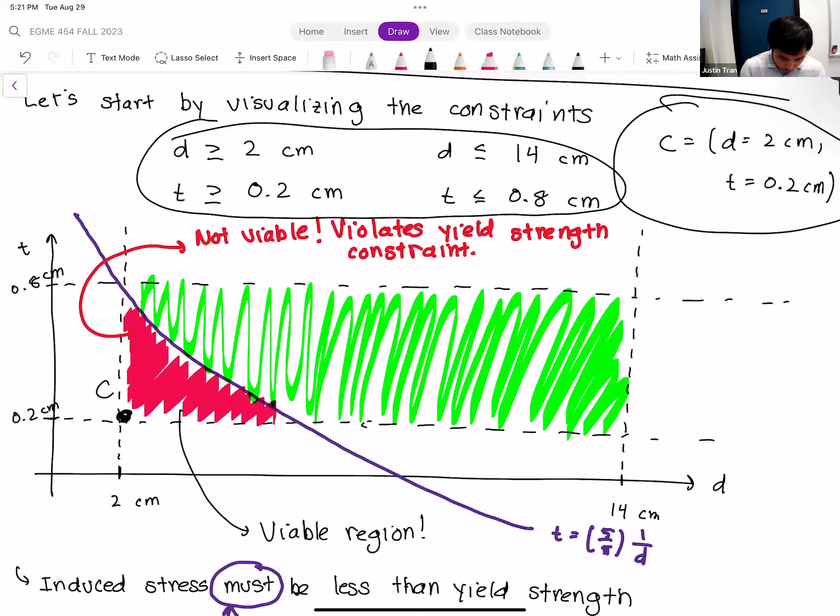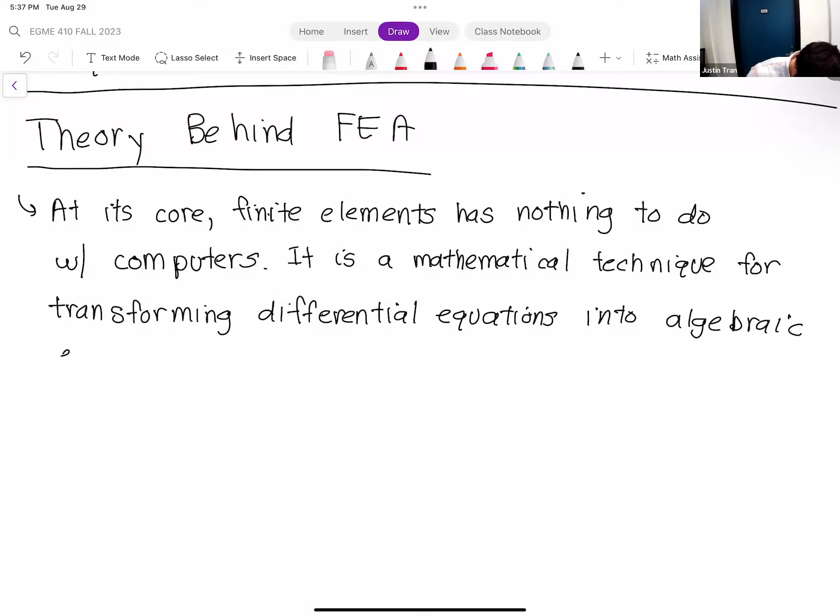So it's basically a form of transformation. In reality it's a lot more complicated than that, but that's generally its main scheme.

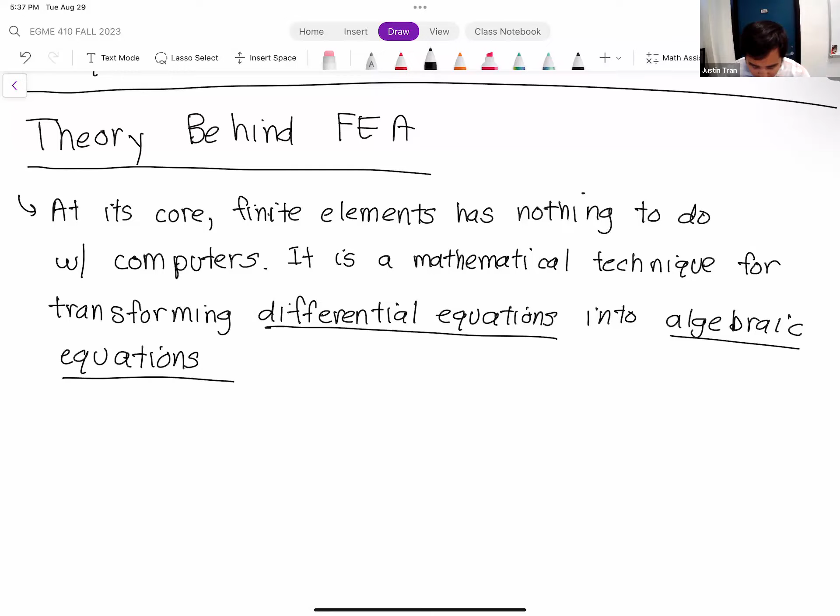The first papers proposing this idea of finite elements kind of wrote it like the following. This was during a time when it was being discovered that a lot of physical phenomena—things like structural mechanics, thermal mechanics, heat transfer, fluid mechanics—the behavior of a lot of these systems are governed by differential equations. For example, here's the heat equation, one form of it.

Okay, so here we have a differential equation. There's a lot of very well established theory, that you may be learning right now in heat transfer 407, or maybe you took 407 last year, that says that by conservation of energy, the way thermal energy moves in a system follows this equation right here. That's very well established. The problem with an equation like this is that this is hard as hell to solve, right? So this is not an easy equation to solve, at least by hand.

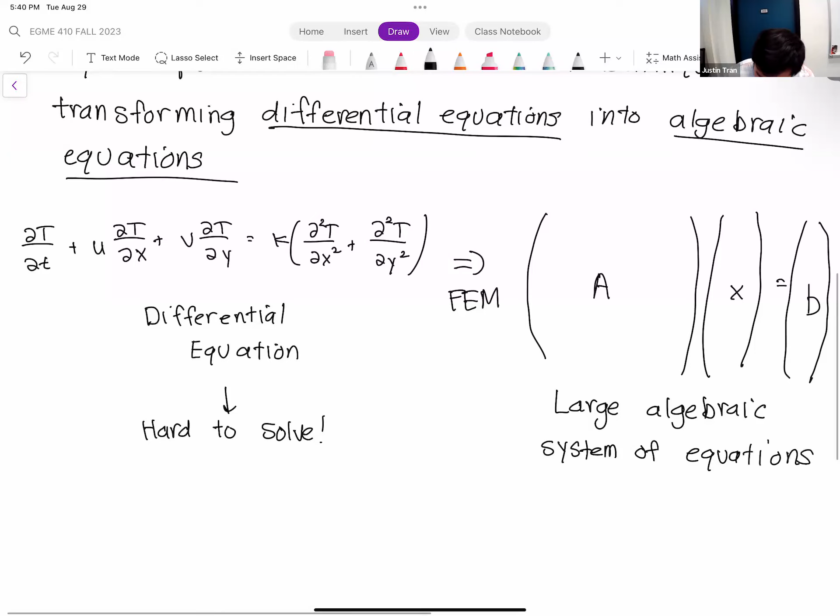And when I say large, I mean very, very large. From your linear algebra classes, a large linear system to you may be 3 equations, 3 unknowns, 4 equations, 4 unknowns, 5 equations, 5 unknowns. These are much larger than that. This is like hundreds, thousands, tens of thousands, hundreds of thousands of equations. So this might be 100,000 by 100,000 equations by unknowns.

So that's the basic idea of FEM: take a differential equation and transform it into an algebraic system equation. The problem with this is that before computers came along, very much like the differential equations, a large system of algebraic equations is also extremely difficult to solve. So we're not really saving ourselves any work here. We're just going from one extremely difficult problem to another, except that along the way, we apply this extremely difficult method known as finite element methods.

So when FEM was first proposed, the mathematics behind it were sound, and they were able to publish it, but there were no real good practical applications of it just because of the difficulty in solving this large system.

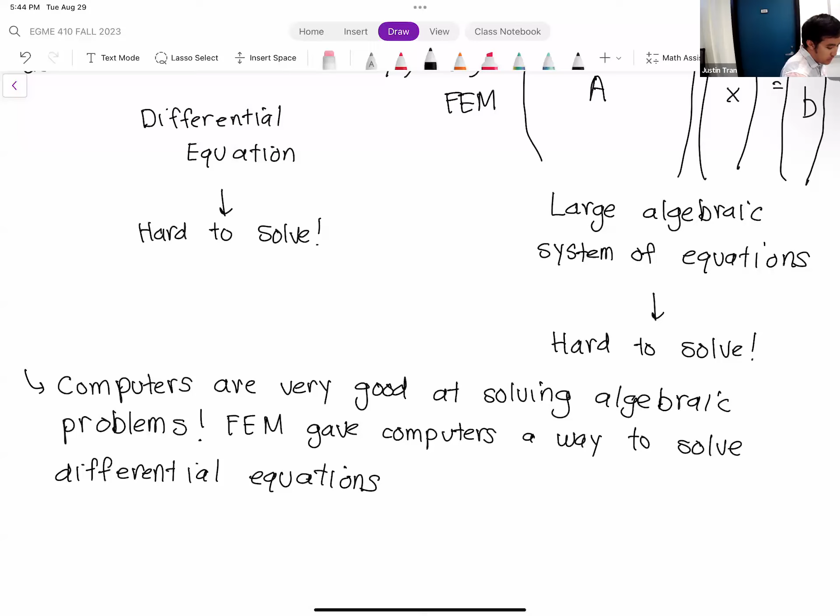So FEM gave computers a way to solve these differential equations, which was massive at the time. On one hand, you have one community of scientists saying that all these physical phenomena we observe in the real world are governed by differential equations, but they're really difficult to solve. Whereas in another area of science and research, they're saying we can take these very complex differential equations, transform them into algebra equations, and have a computer solve them. Once those two communities married each other, modern FEA as we know it was formed.

And from this, we were able to obtain what I consider to be the engineering application, the engineering use of FEA. I have it laid out as a flow chart. Let me label this first: call it modern engineering use of FEA.

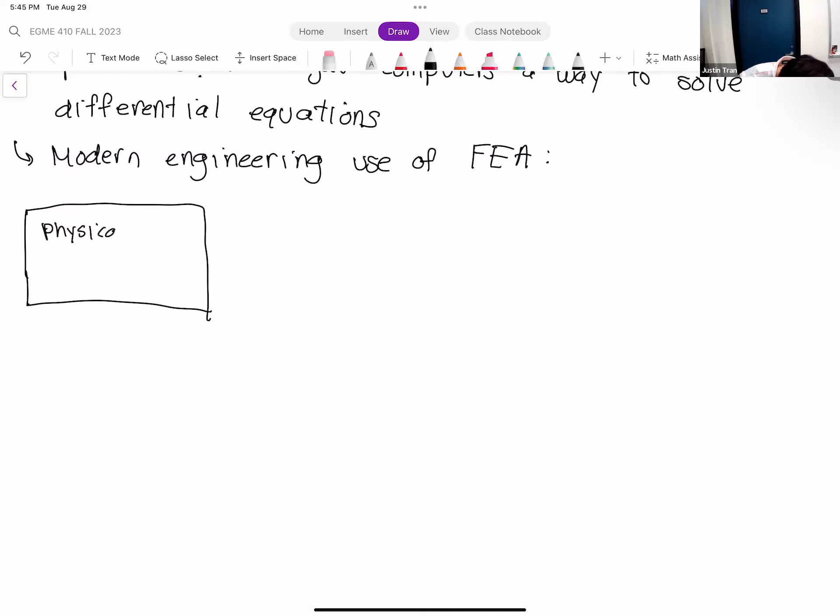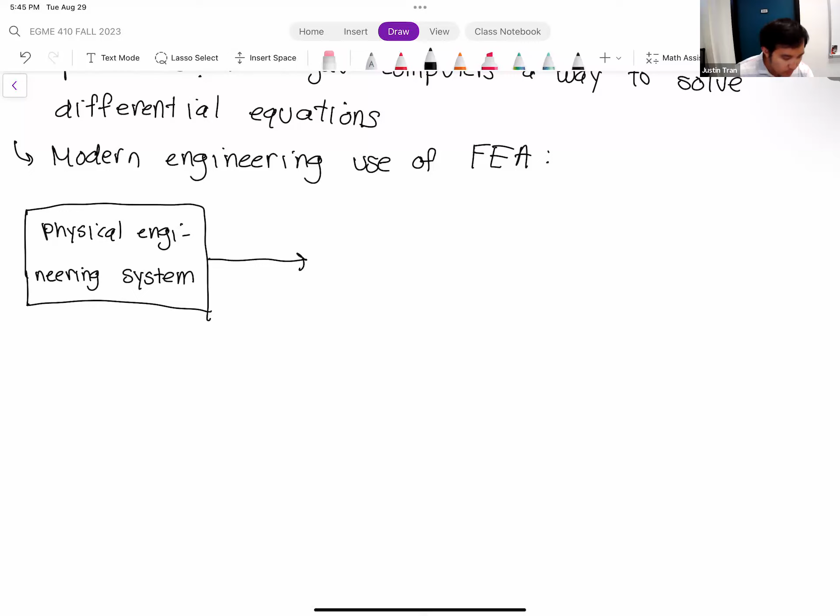So when you're using FEA from an engineering standpoint, most of the time you're starting with some physical system of interest. Whether this be the car that you're designing or a bridge that you're analyzing, you have some kind of physical system. And then from that physical system, it has its own set of governing differential equations.

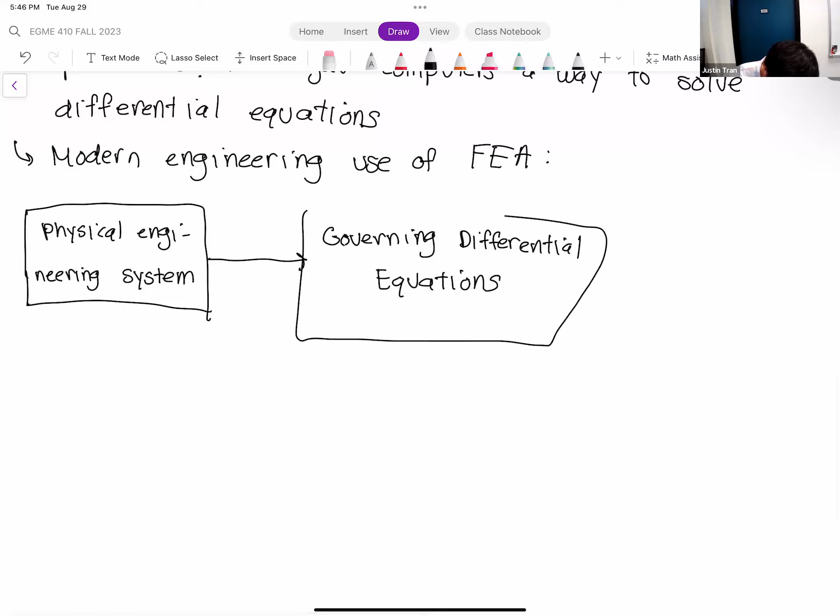Those governing differential equations are what's going to determine the system's behavior. They determine how the system responds to loads, how it responds to constraints, and so forth. If you're going to do any kind of design or analysis of these systems, you have to be aware of what those equations are.

So from here, what you would do is take those governing differential equations and try to solve them using FEA. This arrow right here in particular is FEA. Through FEA, or through using ANSYS, you take those governing differential equations, apply them on your domain of interest, on your geometry, and then you obtain an algebraic system of equations.

Once you have that algebraic system of equations set up, then you can use computers. Computers are really good at doing algebra, and so they're able to solve this system for you.

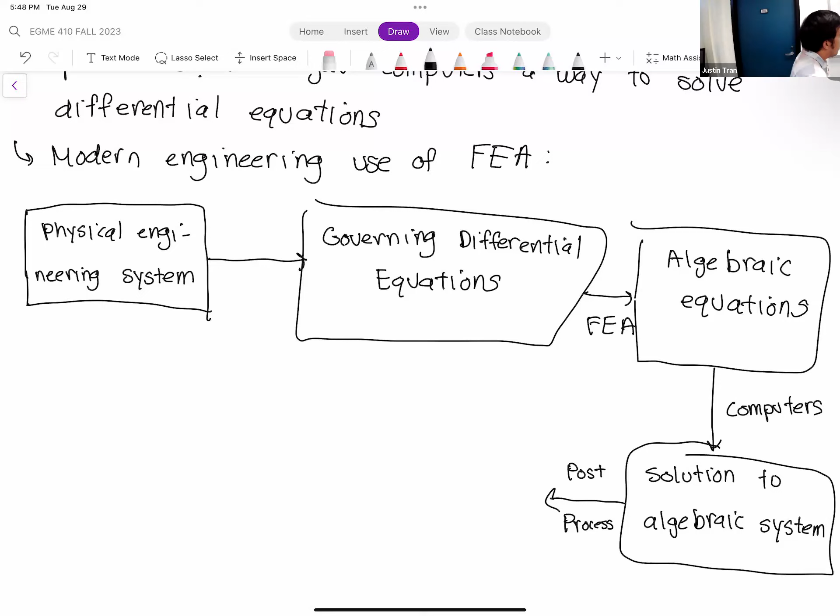From that solution to the algebraic system of equations, that's what I call a raw solution. In its form by itself, it's not really readable by humans, or usable by an engineer. So there's an additional step here, which I call post-processing, that's most of the time done automatically by the computer. What it does is take that raw solution and present it in a form that's useful to the engineer.

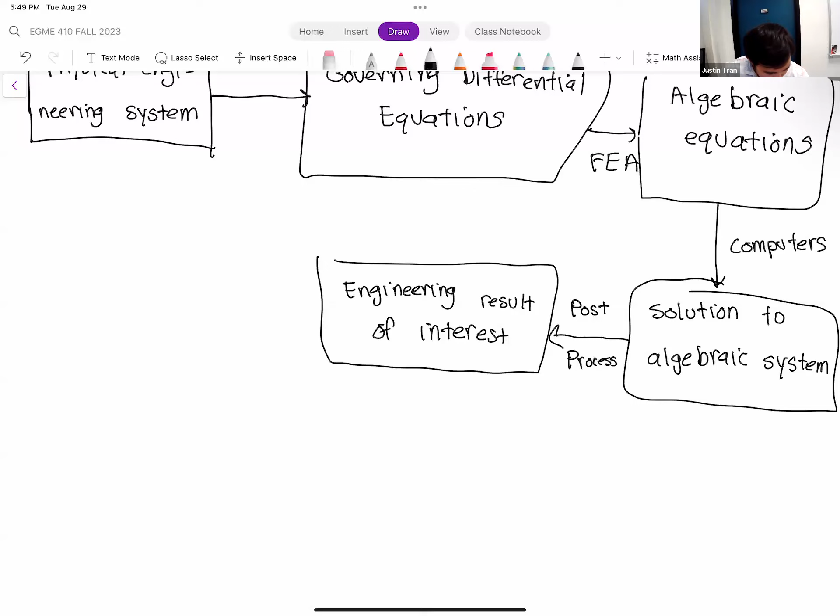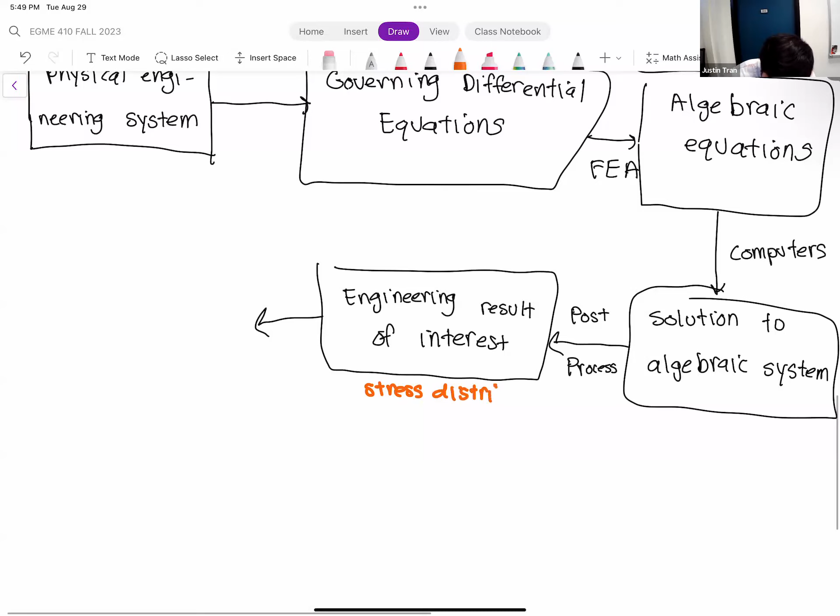From that, you obtain what I call the engineering results of interest, things like stress distributions, deformations, things like the results that we found from our first activity. So what you do then as an engineer is take that information, and that's when you perform your design and analysis and safety analysis and things like that.

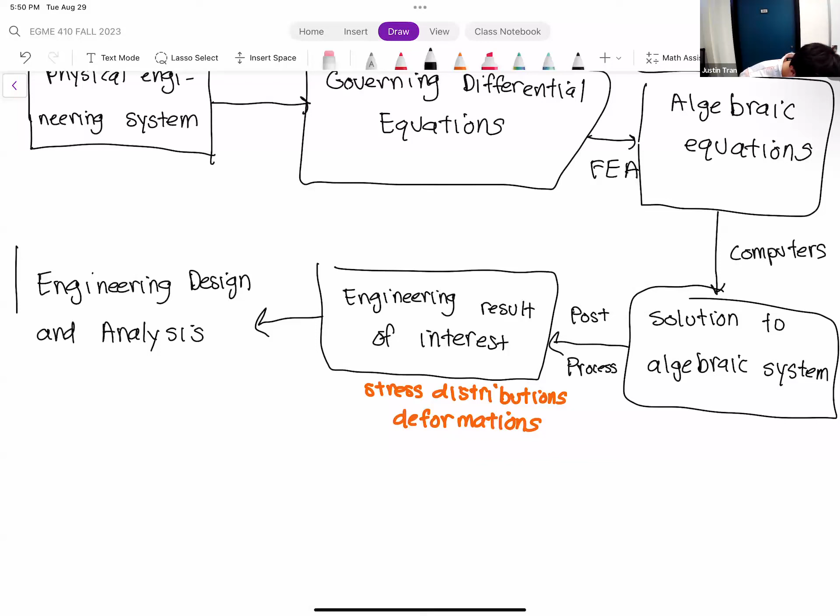This flow chart here kind of gives you an idea of how modern FEA is usually performed by an engineer. And FEA, we've gone over a brief history here, but it's gone through a lot of transformation.

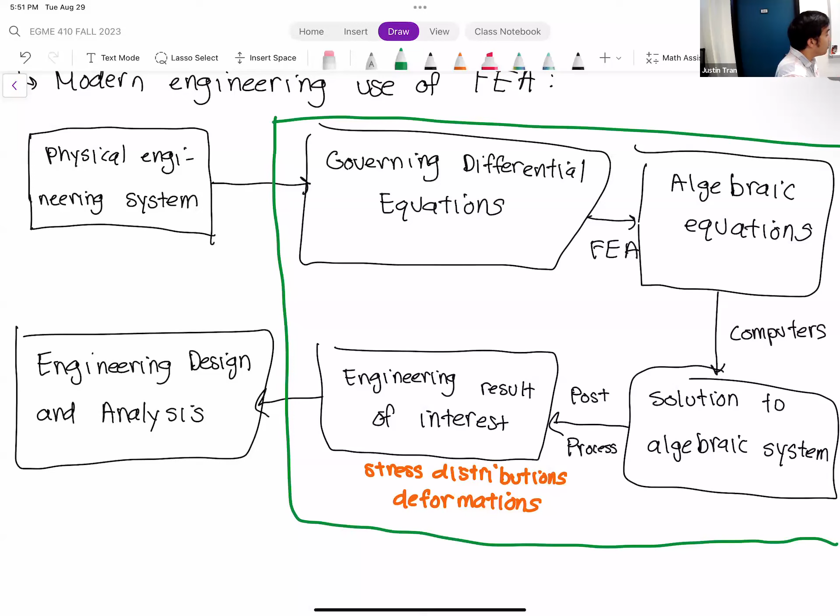The nice thing for you as a user of FEA is that a lot of this is handled within ANSYS itself. I'm talking about these very large, complicated equations, these very complicated algebraic systems, but if you remember from activity 1 last week, you saw none of that, right? All that was handled within ANSYS itself. These four boxes here, which I've highlighted with an even bigger box, all of this is usually handled by commercial software. So all of this is handled by ANSYS, and you see almost none of it.

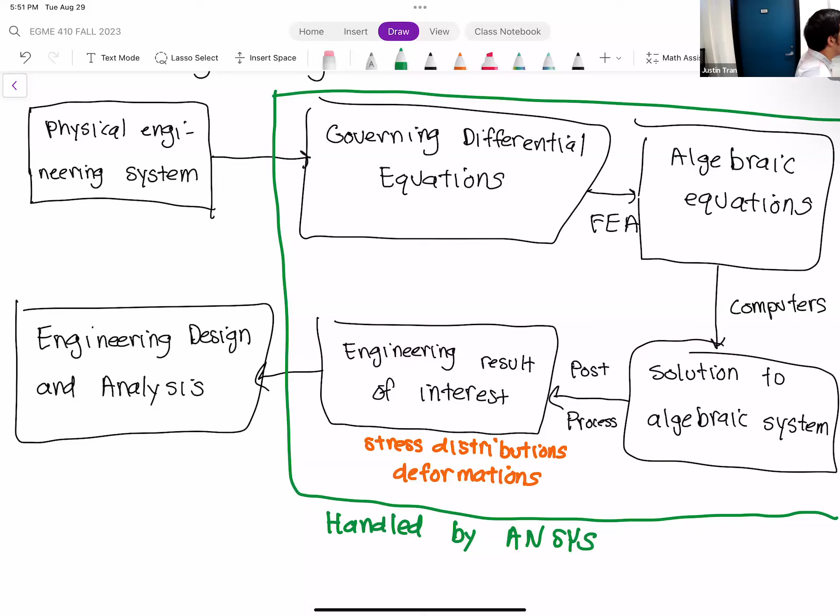For you, all you really see is a CAD file, you see a mesh, and then, like five minutes later, you see deformation, stresses, and all that stuff. But in reality, what's actually happening is all this very interesting mathematics and programming under the hood. ANSYS has packaged it in a very user-friendly format, so that you don't have to deal with any of the math. But it's still useful, so that next time we do ANSYS for activity 2, when you hit solve, you know that ANSYS is actually doing a lot underneath the hood for you, in order to get you the solution that you pick.

Any questions on this?

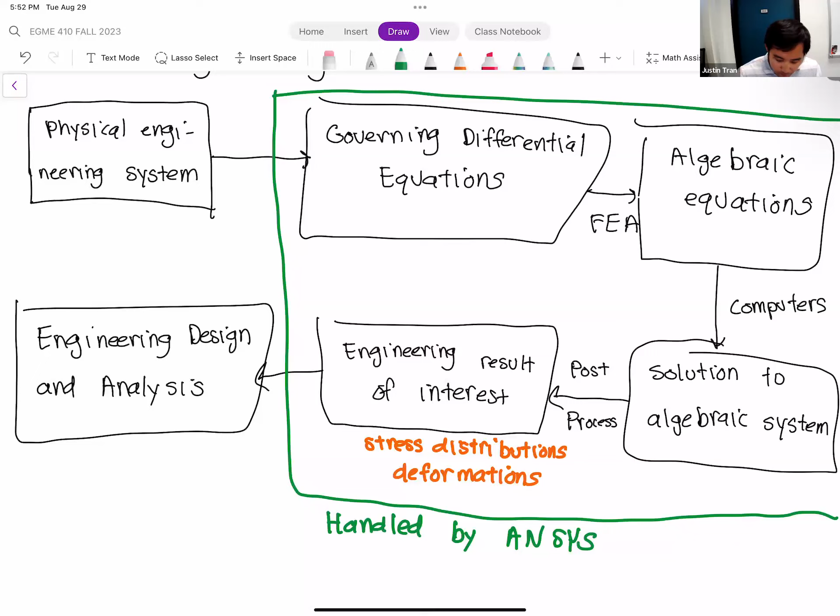I think that's useful to know just from a perspective of a user of the software. But this also gives you some interesting insights into what else FEA can be used for. Because when you use FEA strictly as a user of ANSYS, you may think that you're restricted to the kinds of analyses that ANSYS tells you that you can do, things like static structural, transient dynamics, or thermal fluids and stuff like that. But that's not true. FEA can actually be applied to any differential equation.

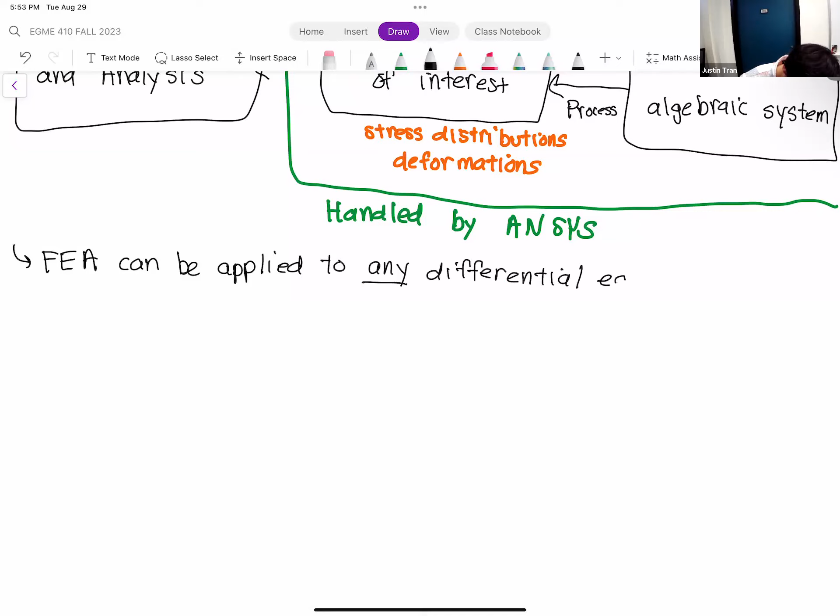Most of the time we associate FEA with physical systems and their governing equations, but in reality, you can solve any differential equations. You'll see an occasional paper pop up from a theoretical math group that has a complicated math equation with no physical significance at all, but the only way they'd be able to solve it is using FEA. This also opens up the possibilities for new equations as well.

You'd be surprised. I think what you learned from your other class is that for heat transfer, the heat equation is the only equation you can solve for heat. But that's not necessarily true, because even though that heat equation may be good for the majority of cases, you may have niche cases, like solving for heat transfer in a material that's melting in real time, where you have different states of matter going on. Or maybe you're solving for heat transfer in a very fast moving fluid, so you need to solve for fluids and heat at the same time. When you have these multi-physics or multi-phase situations with even more complicated equations, you can use FEA to solve them. It's just that you have to write the code yourself.

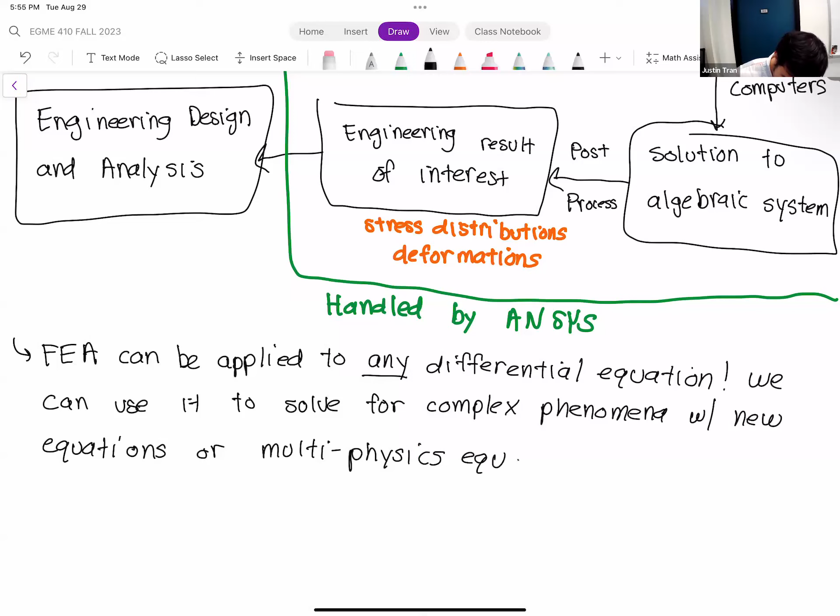You'd be surprised at how often this is applied in practice. I come from primarily a fluids background, so my background is actually more in fluids FEM, and there's a very active and vibrant community around turbulence. You may have heard the term turbulence from your fluid mechanics class, but turbulence is something that's very difficult to model. People are always coming up with different models, different equations, different ways to solve turbulence. Whenever someone comes up with a new equation, they have to write code to solve it. So all the CFD codes are constantly being revamped with new turbulence models and new turbulence equations. This comes up quite a bit.

Part of me is a little bit sad because of the way I transformed this class, it's much more ANSYS based than what I used to teach. I used to teach that transformation process so you could learn a bit about that. Now what I usually tell students is that if you're interested, I do teach a graduate level FEA course, and we cover it more there.

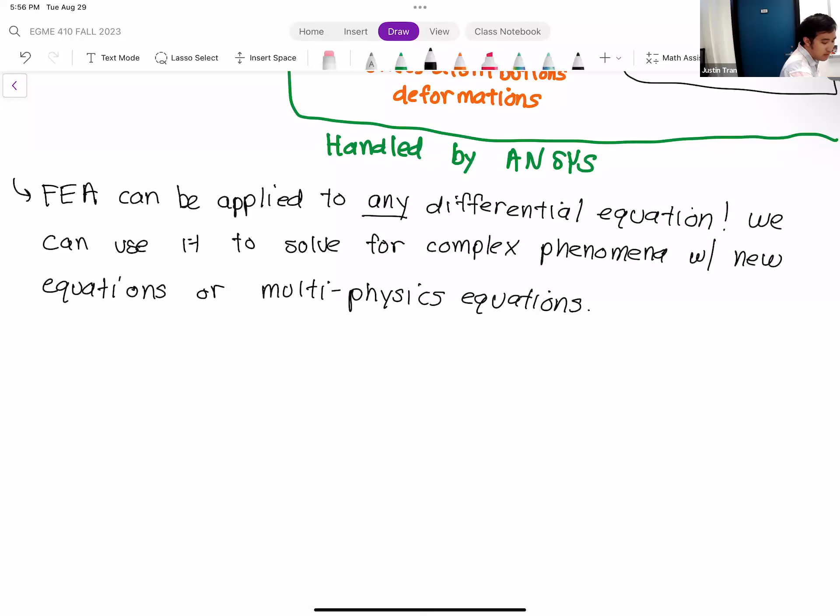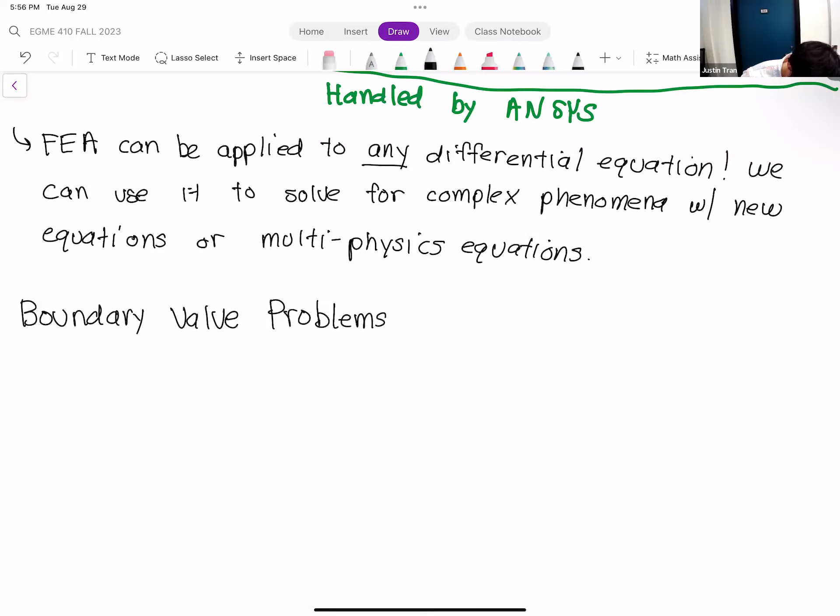Okay, well, let's go ahead and move on. That's a bit about the history of FEA. Let's talk about more relevant things, let's talk a little bit about boundary value problems. A boundary value problem, the way modern FEA is designed, is that it's primarily designed to solve what's called a boundary value problem. This is the mathematical expression of an FEA.

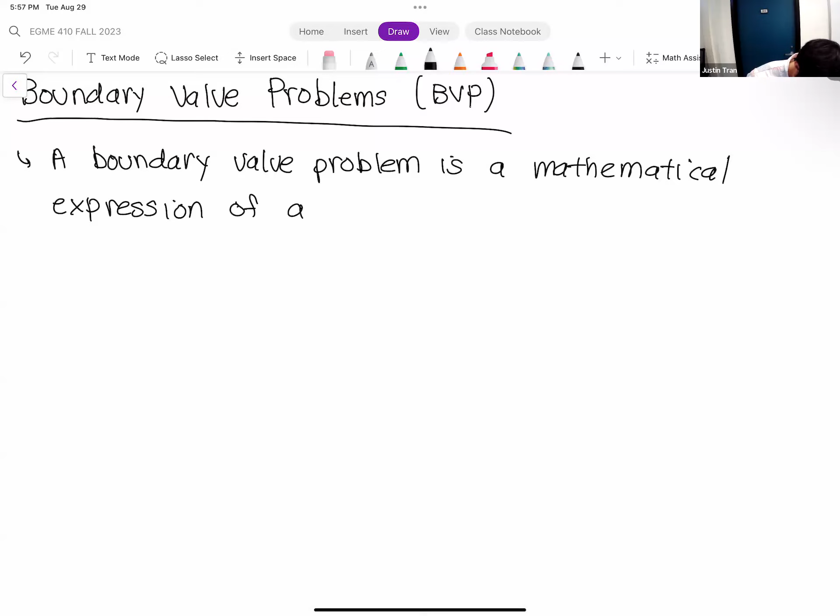Another way you can think about this is that every FEA problem or every FEA analysis, you can express as a boundary value problem. It's useful to talk about boundary value problems because the different components of a boundary value problem almost have a one-to-one correspondence to how you set up an FEA. There are three components of a boundary value problem that I want to go over.

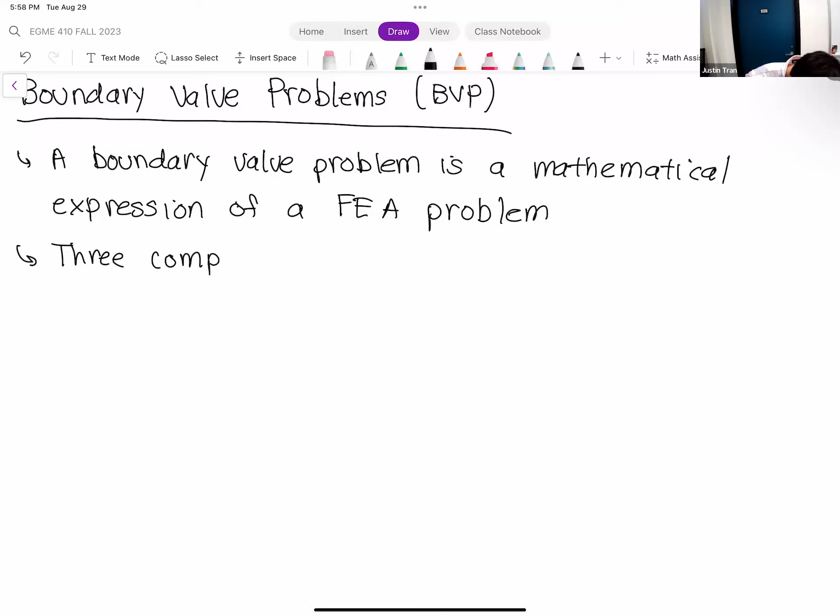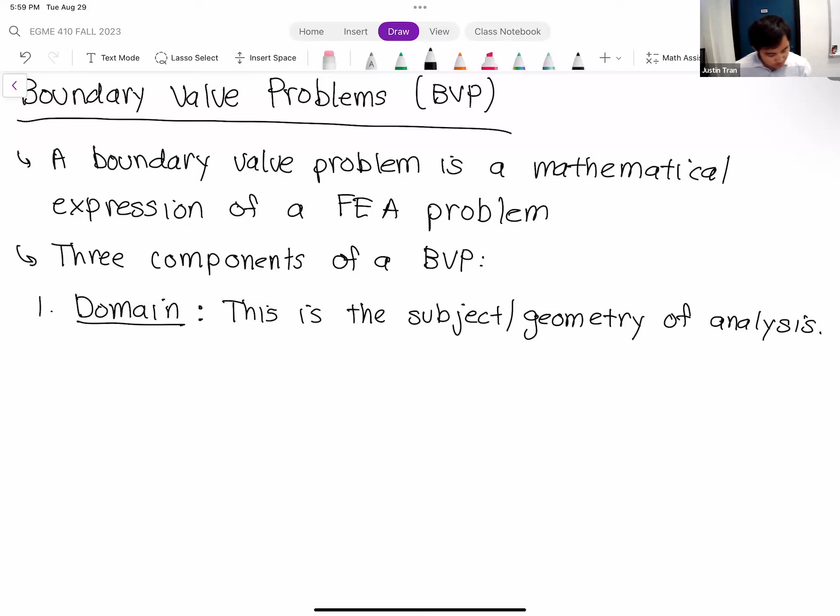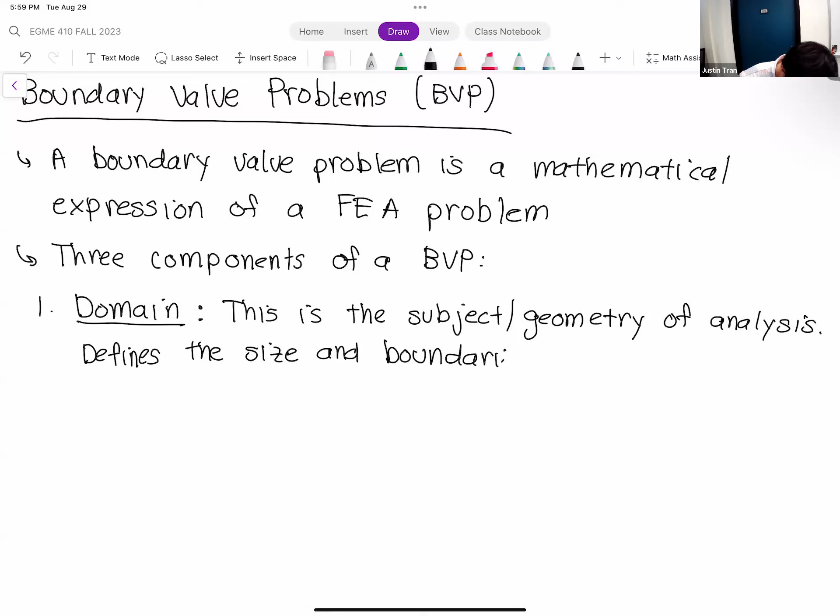The first component is the domain. The domain is basically the subject, or the geometry, of your analysis. It defines the general size, the general dimensions of where your analysis is going to take place. For most of this class, your domain is mostly going to be defined by your CAD file, whatever geometry you import into ANSYS.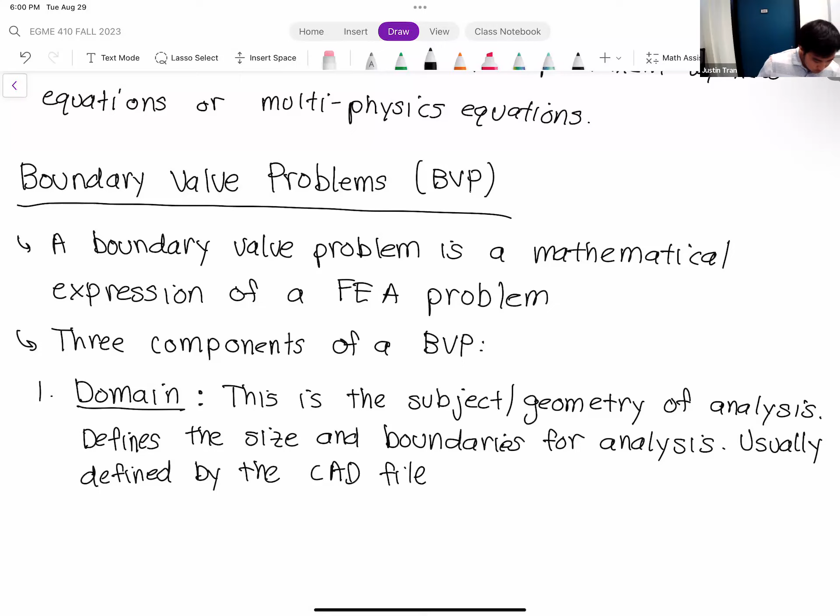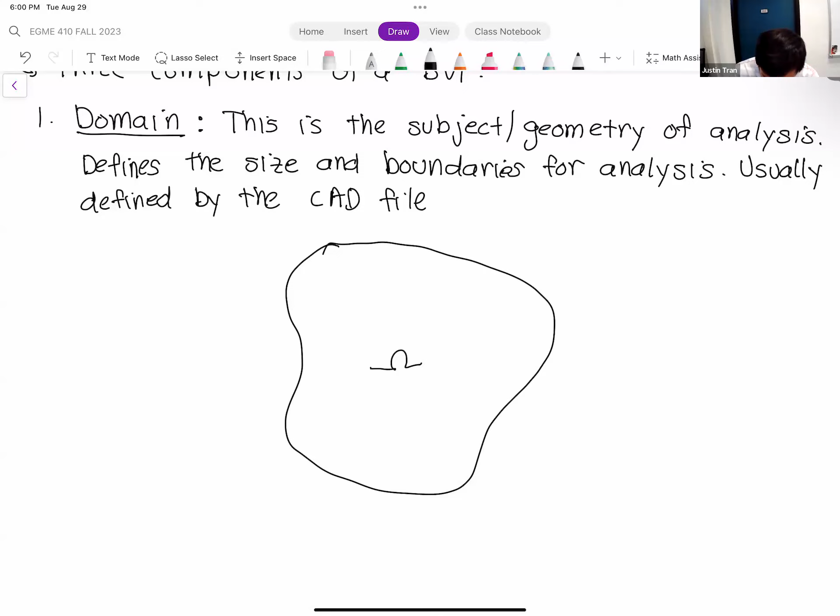A little bit of terminology with respect to the domain: your domain is broken up into two parts generally. There is the interior of the domain, usually given the symbol omega — that's kind of like the inside of the domain. And then there's the exterior, the boundary of the domain, which is given the symbol d-omega. So we have the boundary, which is like the shell around your domain, and the interior, which is the insides.

The domain, I think, is the part that people think the least about when they're doing FEA. I think people have the impression that you think about the domain, or the geometry, when you're making the CAD file, and then once you get to FEA, you just do analysis on whatever the domain is. But it's actually very useful, and sometimes necessary, for you to really think about what the domain of your analysis should be.

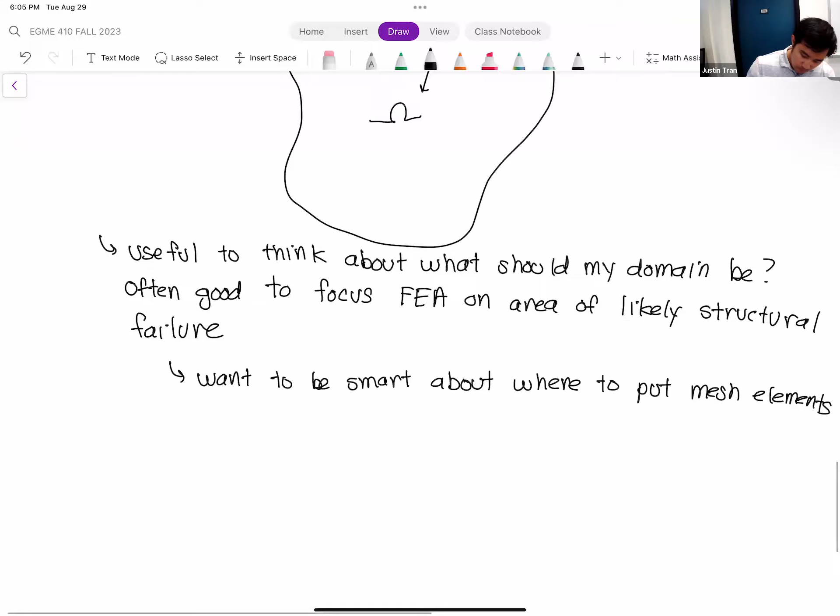And so when you go to run your FEA, it's kind of a waste to create a mesh for this entire bridge when the vast majority of the bridge is already going to be fine. If you try to mesh your bridge and put a bunch of elements over there, those elements basically aren't going to be doing anything because they're going to have very, very little stress.

So it would be a better idea to take your domain and break it down to just the section where the stresses are going to be high, where you want to focus your analysis, so that you're a little bit smarter and more judicious in terms of where you apply the mesh elements. We'll be going over a lot of this throughout the class.

I mentioned this because people almost never think about their domain. Thinking about it and saying, what's the best domain for my analysis or what I'm trying to accomplish—that's something that's really important. Any questions on this?

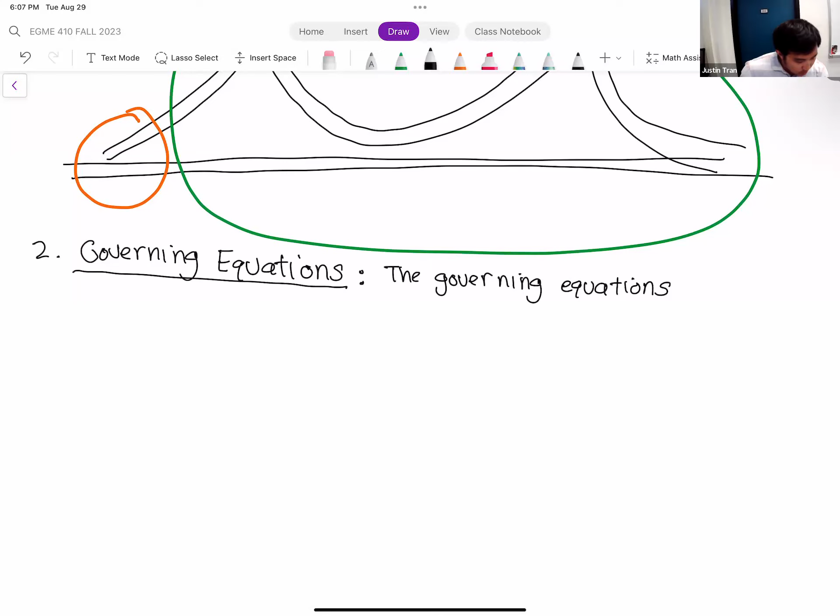After your domain is established, after you know where you're solving your equations, you want to know what equations you're actually going to solve. The governing equations are going to determine the type of physical behavior that you expect to solve for in your domain.

In ANSYS, the way you choose this is when you choose the type of analysis system that you're going to run. Are you going to be solving a structural problem? Then you should choose a structural system. Are you going to be solving a thermal problem? Then you should be solving a thermal system—choose a thermal equation.

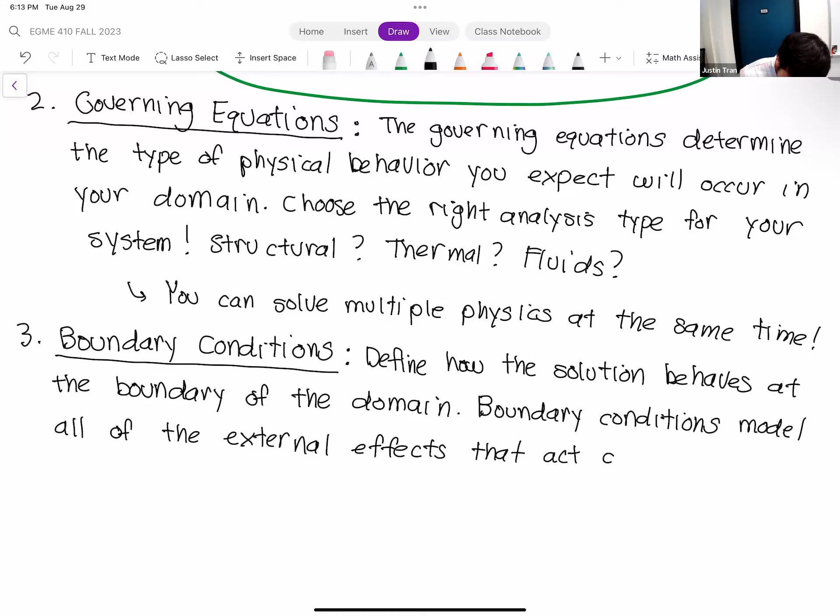So anything that's external to your system, you can account for in the boundary conditions. Like I mentioned, because we're working with structural mechanics for the vast majority of the class, we think of the boundary conditions as the loads and constraints that we apply on our system.

So if you have an external force that's being applied to your system, or maybe your system is being bolted or fixed to a certain location, the way that you account for these is through the boundary conditions. Most of the time, the boundary conditions that you apply are fairly straightforward. If you have an external force of 5,000 newtons, you can apply that directly onto your system.

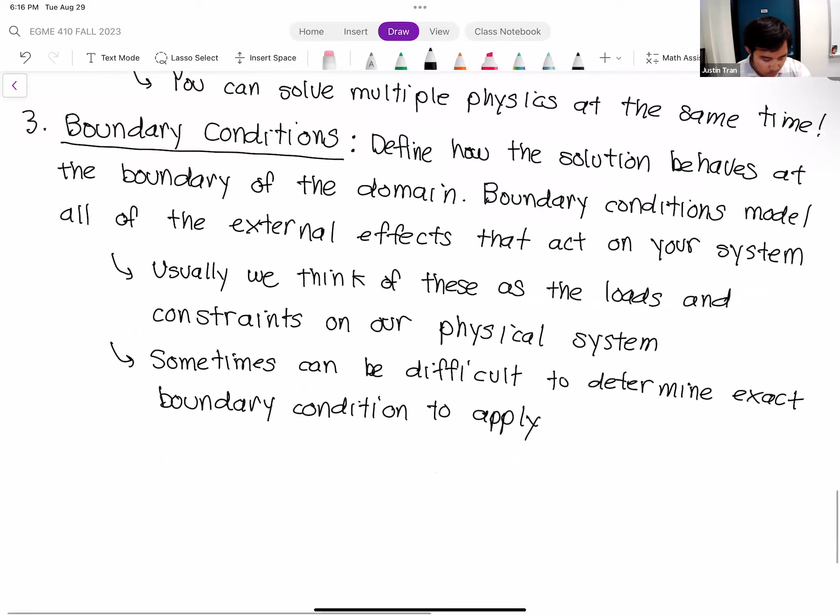But sometimes you may have situations where you know there should be a boundary condition somewhere, but how you actually model it or put it into ANSYS is not clear. Maybe you're not 100% sure exactly how much force is being applied, or you're not exactly sure of the direction, or maybe you're not even sure if the force is being applied there at all. It really depends on your situation.

Determining what types of boundary conditions to apply is something that's very important. In fact, if you get the boundary conditions wrong, or you get the load incorrect, or you constrain it in the wrong place, it can actually give you very wrong results.

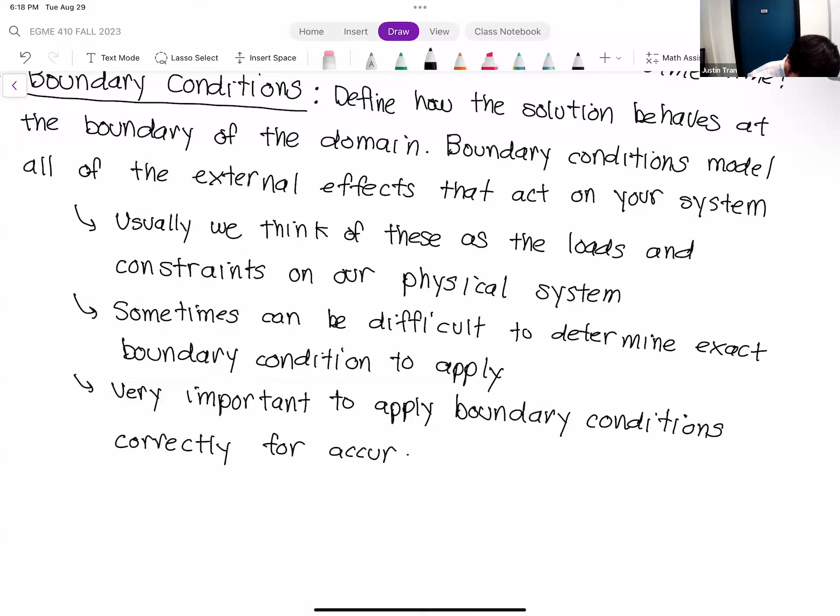This may seem like an obvious fact - of course you have to do things correctly to get a correct result. But one thing we're used to with computer software is that if we make a mistake, the computer often tells us. With boundary conditions, if you apply them incorrectly, the computer is not really going to tell you that it's wrong.

For instance, let's say you're designing a bridge - I'm not going to draw it again, I'm already embarrassed from the first one. Let's say you want to model the force of cars being applied onto the bridge, and you're running this in ANSYS, but you accidentally apply the force from the cars going vertically upwards instead of vertically down. That's a big mistake, and it's going to give you very wrong results.

ANSYS is not going to tell you that you got that direction wrong. It's going to think there's just a force here being applied up towards space for some weird reason, and it's going to run your simulation. Then you may take that simulation and think your bridge is good, when really the force is being applied in the wrong direction.

So it's very important that when you're doing a more complicated FEA, you look at all your boundary conditions and make sure they're applied with the right amount of force, that you're constraining your subject the right way, that you're applying force in the correct direction - all those things, because very rarely, if you apply boundary conditions incorrectly, is ANSYS going to tell you. But of course, boundary conditions are very important.

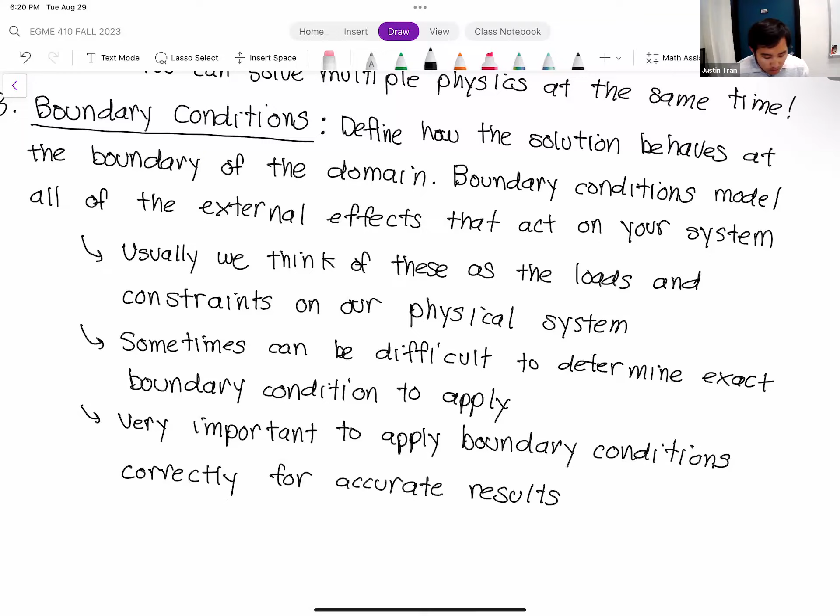All right, so let's talk about governing equations a little bit, and give a little more context in terms of the types of equations we typically see in mechanical engineering, what they look like mathematically, and what ANSYS is exactly going to solve. Let's talk about the types of governing equations we can use.

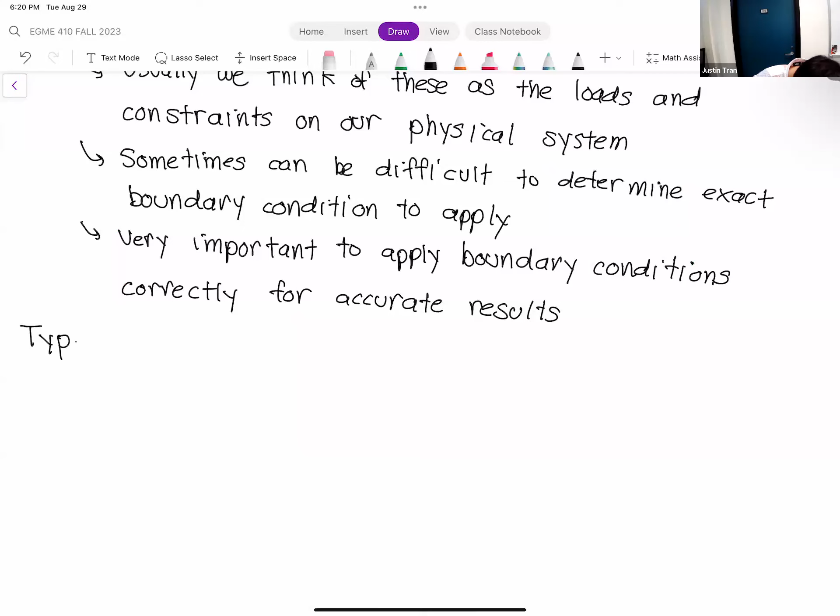We're going to go over three - I think the three most common ones you'll see in mechanical engineering. The first one I want to go over is our usual structural equation, which is linear elasticity. These are equations that determine how solid objects deform when they're being subjected to external load.

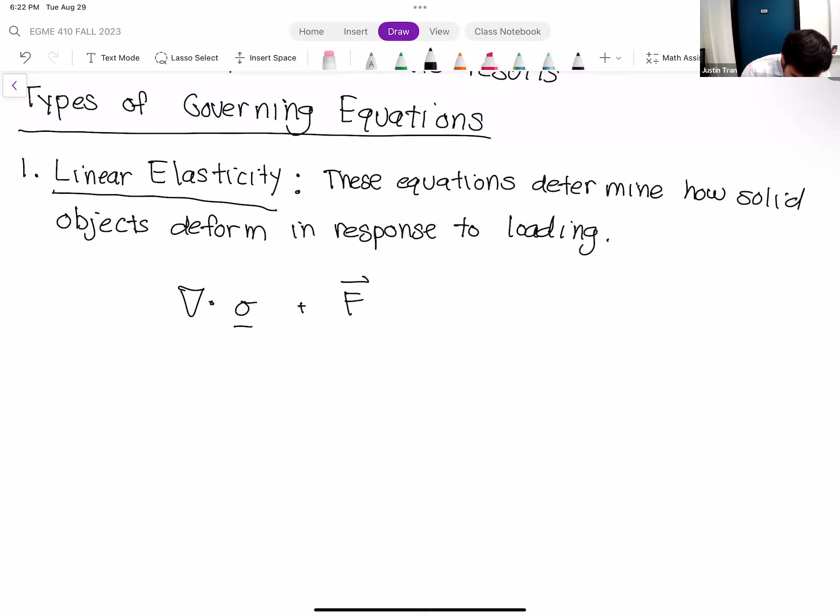The exact equation we solve for looks like the following: the divergence of the Cauchy stress plus a body force vector F is equal to the density times the second derivative of the deformations - partial squared u, partial x squared. Very complicated differential equations. Remember, we're not actually solving these ourselves, they're solved for in the computer. But if you wanted to solve for the deformation distribution within a structure, this is how you would do it.

Under linear elasticity, what that basically means is that the relationship between stress and strain within a structure is purely linear - stress is equal to Young's modulus times the strain. That's the stress-strain relationship. Hopefully that equation is familiar to you.

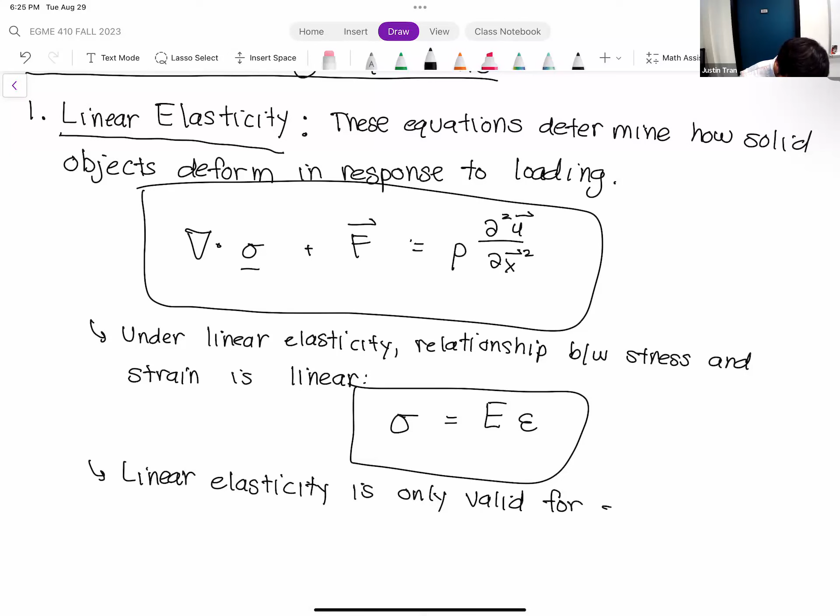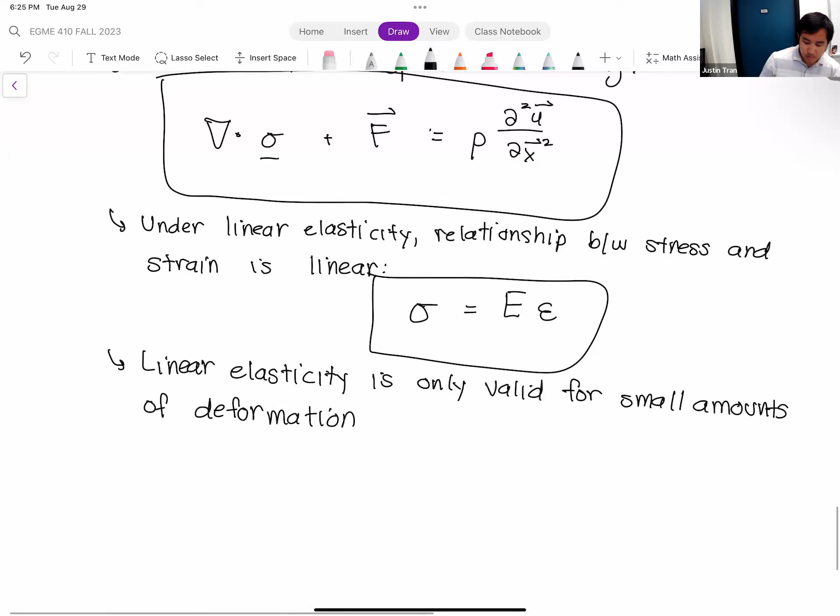If you look at a typical stress-strain curve, it looks something like this: you have a linear region, and once you reach a certain point, you go to plastic deformation. Linear elasticity is only valid in that first linear region, when the strains are small.

Is this why on our exercises you'd have us get to these insane values, because it's just following it linearly? Exactly, yes - if you get that, the metal would have sheared long ago. Yes, that was my next point. When we're running these static structural simulations, it assumes it keeps this linear relationship all the way through. So when you're getting very large deformations in ANSYS with static structural, that's usually a good indication you should probably run a different equation, because static structural assumes this linear relationship.

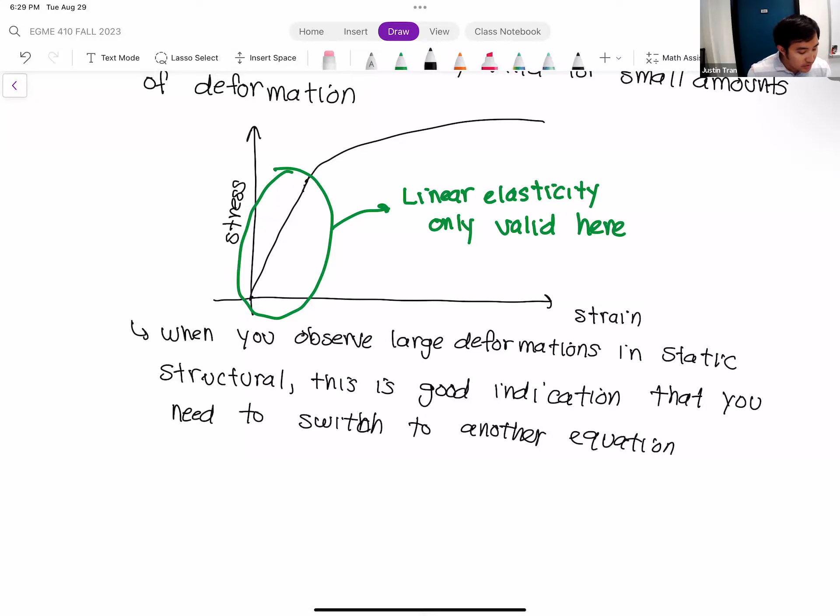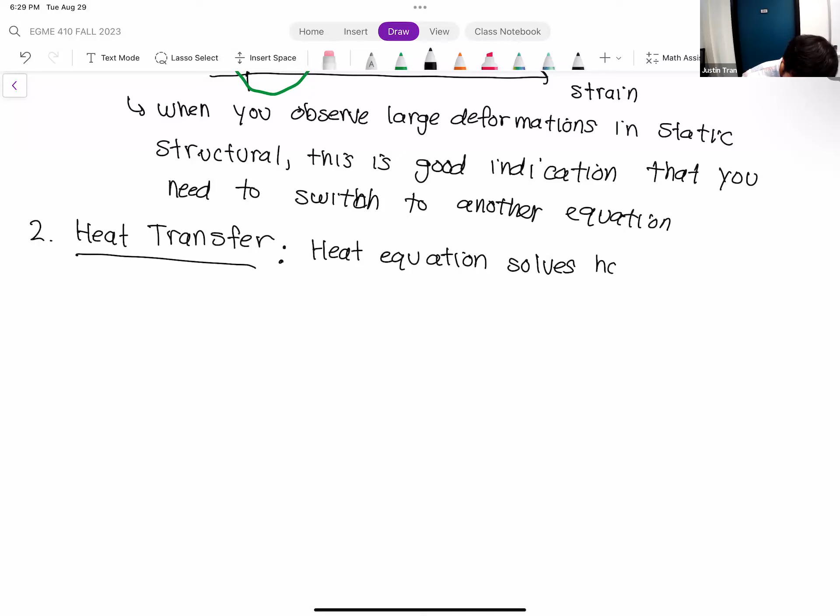Okay, so that's static structural, and that's probably the one we're going to use the most in this class. The next most common one you'll see as a mechanical engineer is thermal equations, so these are heat transfer equations. Heat transfer equations determine how heat or energy propagate or move throughout a physical system. What you're solving for from the heat equation is the temperature distribution.

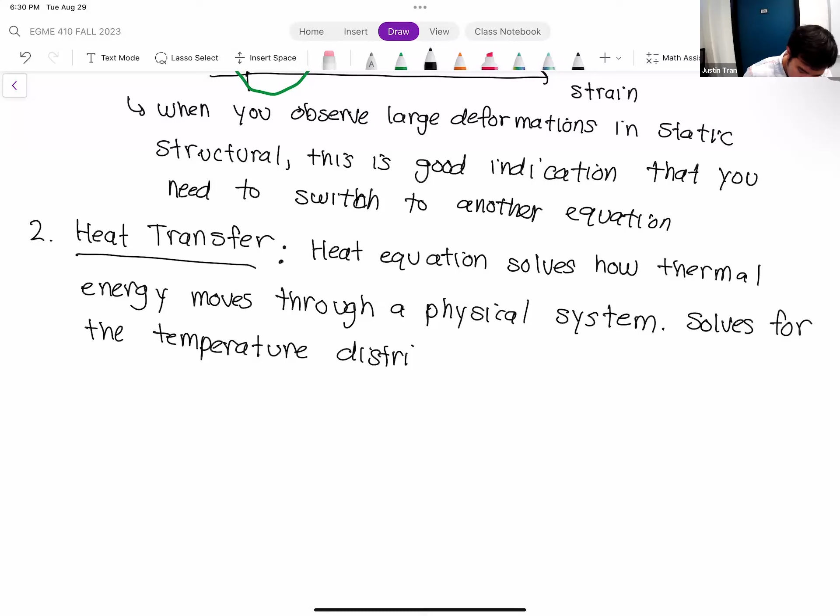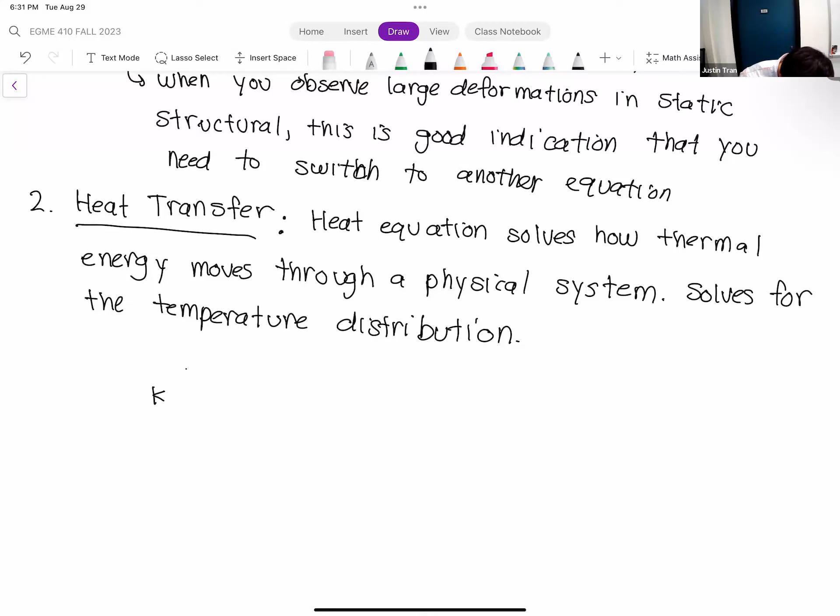The equation I showed at the beginning of class today involves convection as well. But when you're solving for a steady state thermal within ANSYS, most of the time you're solving just the conduction problem. The equation looks something like the following: K times the partial squared of T partial x squared, plus partial squared T partial y squared, plus partial squared T partial z squared, is equal to some q of x, y, z.

Mathematically, interestingly enough, the heat equation is actually much easier to solve than the structural mechanics equation. If you ever take a graduate level finite element course, where you learn how the FEA method actually comes up with that algebraic system, most of the time you're going to be working with the heat equation just because it's a lot easier to solve. You only have second order derivatives, which is actually quite simple.

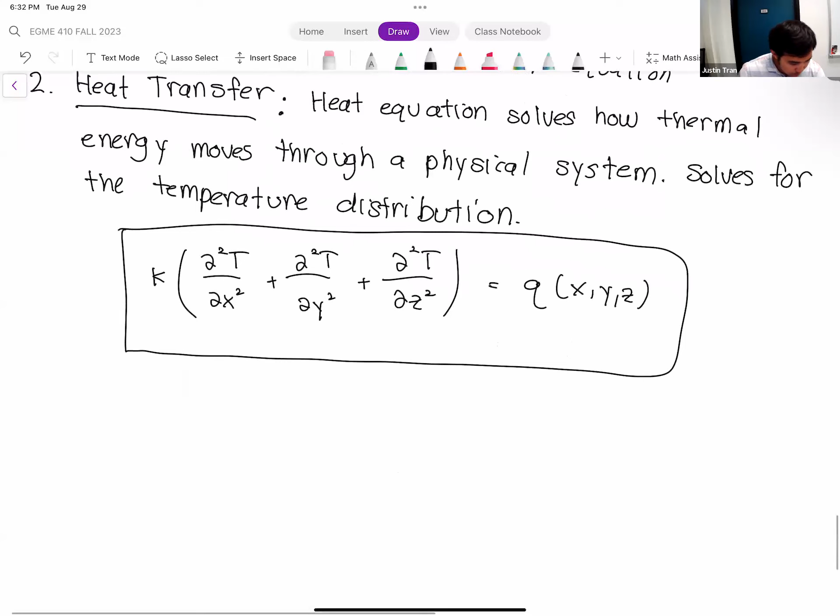And so another name for this equation that you might find in the literature is the Laplace equation or the Poisson equation. This is actually one of the few partial differential equations that you can actually solve by hand. If you take the course, I believe it's 438 or 538 if you're a grad student, you'll actually learn how to solve this equation, which is really interesting. Very difficult, but very interesting.

So we won't do too much with the thermal equation. I think I have one lecture dedicated to it near the end of the course. But just know that this is an option within ANSYS. And once you learn how to solve the structural equations, how to set those up, the thermal equations are actually a lot easier to solve. Any questions on this?

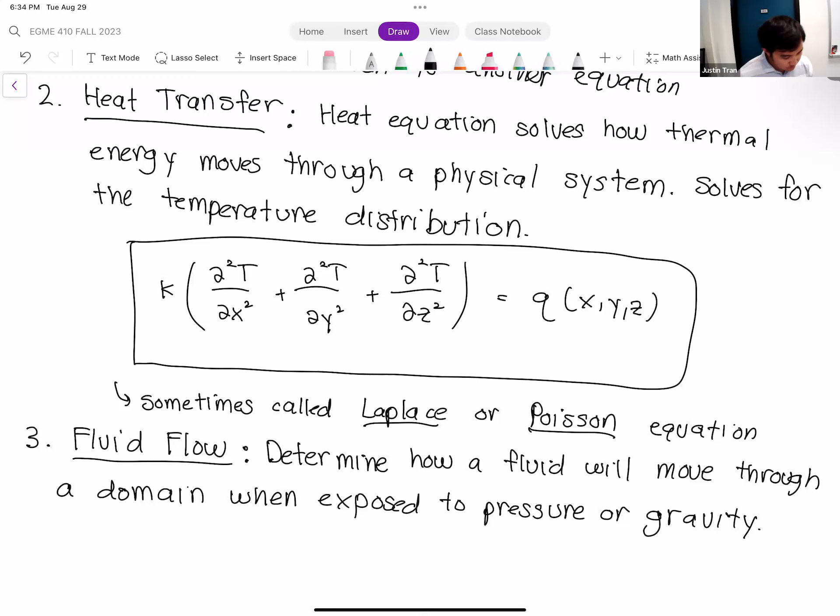Okay, and so the last equation that mechanical engineers typically work with when they use FEA is fluids. The fluid flow equations, you may be familiar with them, these are the Navier-Stokes equations. These equations determine how fluid will flow inside a domain when exposed to pressure or gravity. Some of you may be familiar with the term CFD, or computational fluid dynamics. This counts as CFD, so you can use FEA to solve for fluid flow, and that would technically be computational fluid dynamics.

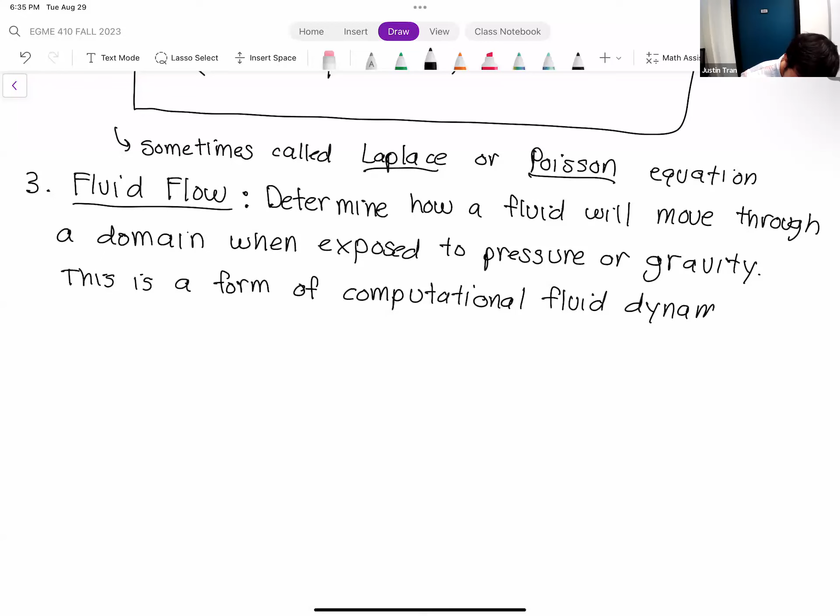And so I say this is just one form of CFD, and it's actually not the most common form, because there's more than one way to solve the fluid dynamics equations using computers. FEA is one form, but it's probably not the most common. The most common form would probably be finite volumes, so that one is more common. I think some of you have experience with a software called OpenFOAM, and OpenFOAM uses the finite volume method to solve for the fluids equations.

And actually, next semester, if you're still going to be around, I know Dr. Myral's been working on a CFD course that he just proposed last semester. I think the plan is for him to teach it in the spring, so if that's something you're interested in, definitely check it out. We're going to touch on FEA for fluids a little bit at the end of class, but it's definitely not an emphasis. So if CFD is something you're interested in, I'd recommend you check out that course. I don't know if he's decided on a number yet. Okay, so the governing equation for fluids is going to be the Navier-Stokes equations.

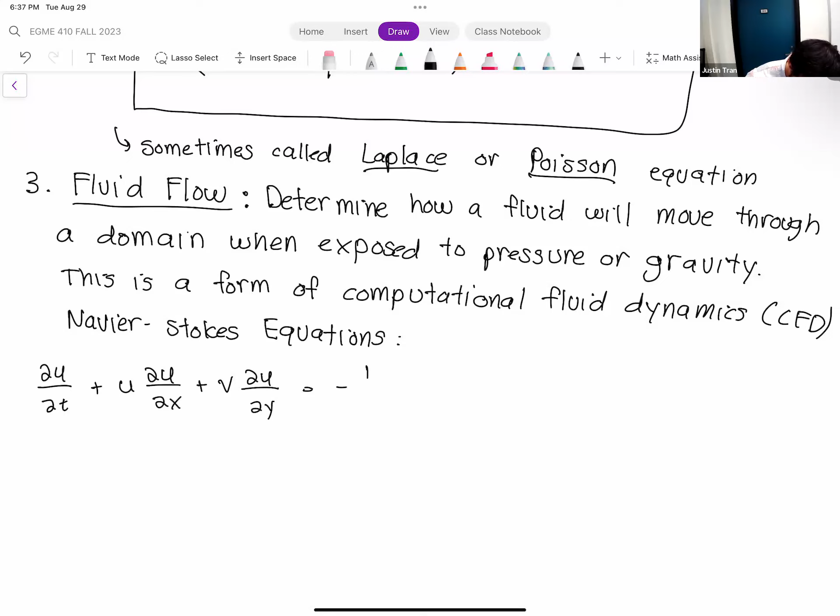So that's partial U, partial T, plus U, partial U, partial X, plus V, partial U, partial Y, is equal to minus 1 over rho, partial P, partial X, plus nu, partial squared U, partial X squared, plus partial squared.

I really like the Navier-Stokes equations, and like I mentioned, my background is actually in fluid mechanics. It's been about 3 years since I've taught the fluid mechanics course here, and I miss it every day. I miss it so much that I've named the Wi-Fi in my home Navier-Stokes, and my wife always says, why is that some kind of dirty engineering joke? I'm like, no, it's the name of the fluids equation. It's really cool. She still thinks it's some kind of weird dirty engineering joke, but it's not, it's this equation. But yeah, I miss it.

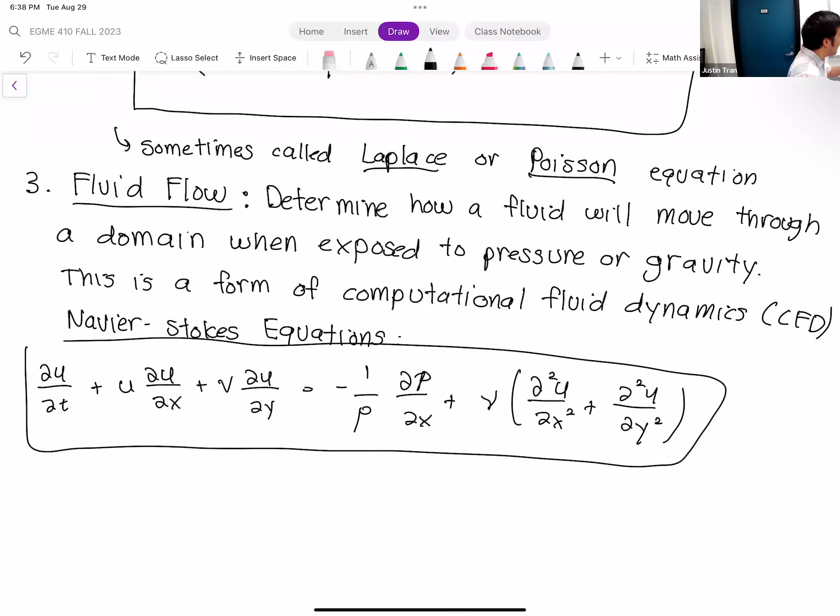But this is as close as I can get to teaching fluid mechanics, so I'm enjoying this moment. All right, so if you want to run CFD within ANSYS, ANSYS actually doesn't solve fluid flow itself, so ANSYS will run another program called Fluent.

If you noticed from the activity last Thursday, when we actually went to mesh and solve our structural equations, ANSYS used a program called Mechanical, or ANSYS Mechanical. The fluid solver is actually in a different software called Fluent. I'm still not 100% sure, but I think what happened was that Fluent existed as its own software for a while, and then ANSYS just bought the company, making Fluent part of ANSYS. So that's kind of why it exists how it is.

So we have three main equations: structural, heat transfer, and fluid. These are probably the three main ones that you're going to see as an engineer, as well as a few other smaller ones. Throughout this class we'll be learning things like vibration analysis and modal analysis, which I think is generally very useful, but that's kind of a spin-off of the structural equations. These are the main three that you'll see. Any questions on this?

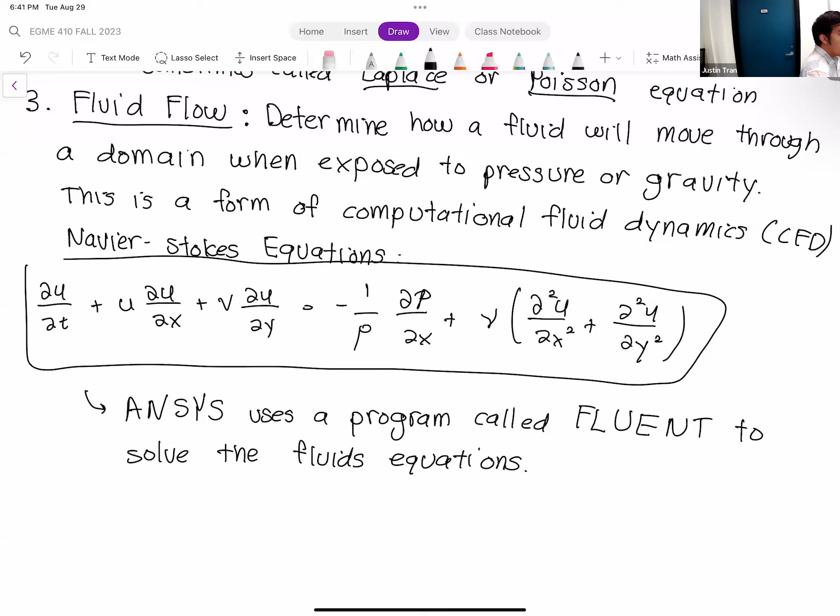Any other questions? All right, and the last thing I have here is just multi-physics stuff, but we've already talked about that. So that's it for the lecture today.

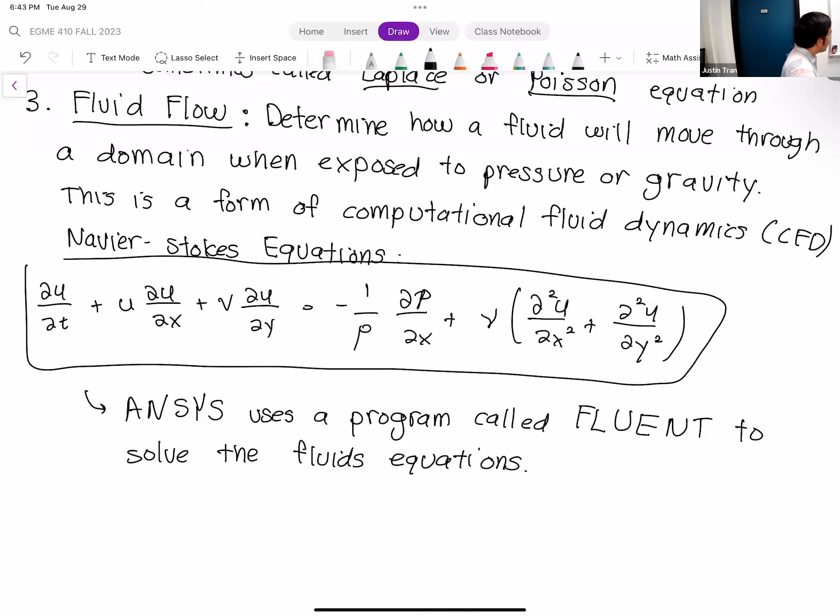So did you see my face? My face is burned. It always is.

Not every Thursday, it's almost Thursday. Every other Thursday, so not this Thursday. I have to check, but they took it down. I haven't checked it this week.